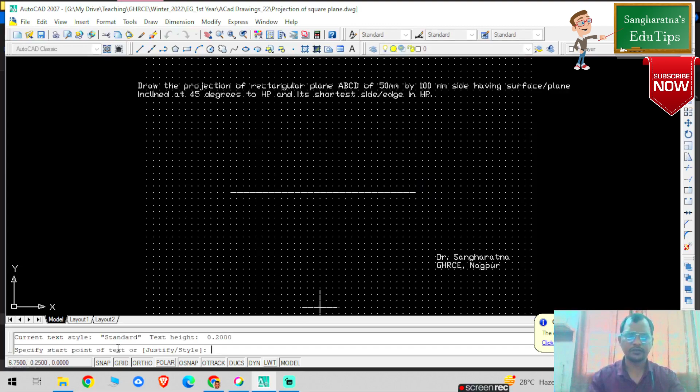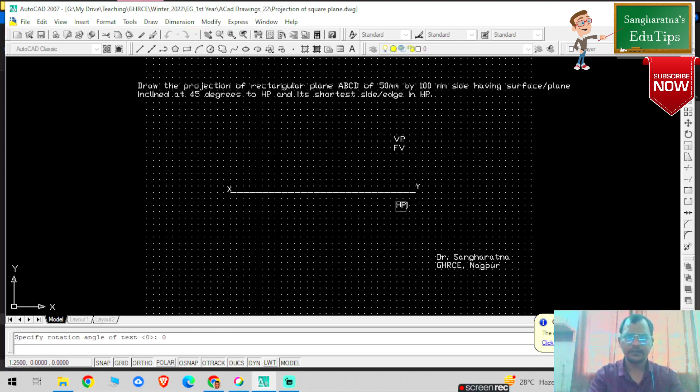Its shortest side edge is in HP, meaning the true length will be on the XY reference line. So let's draw it. Draw one reference line XY, click snap, and give it a naming label. Select any point, height, rotation angle 0. This is my X and Y reference line. Above the X line is VP, where we always draw the front view. This is HP, where we draw the top view.

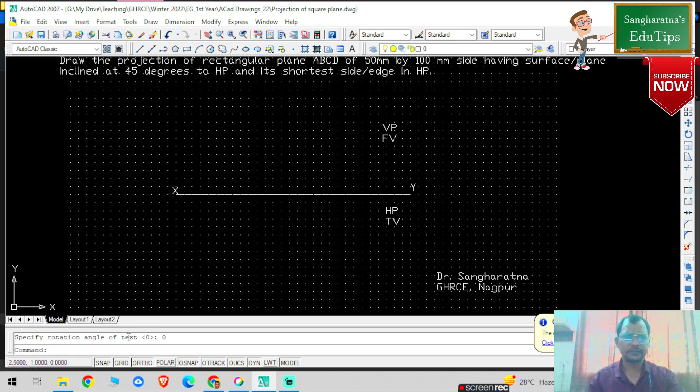Now press escape. First draw a rectangle of 50 mm by 100 mm. Select any point, because the side or edge in HP means the left hand side will be perpendicular to XY. So here I have selected, and this is my 50 by 100 mm rectangle.

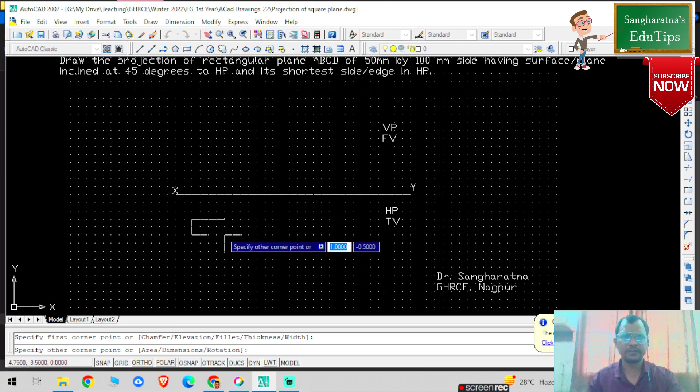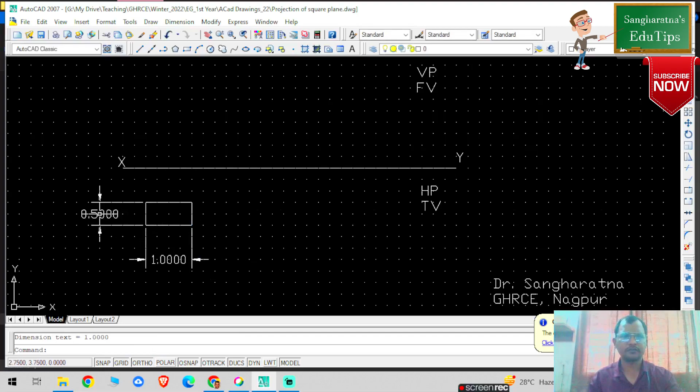You can check the dimensions. Go to dimension, select line, and this point is 50 mm. Go to dimensions again, select this point, this is 100 mm. Convert these dimensions into cyan color. Whenever you can't see anything on the screen, just zoom it. To return to the original screen, press Z, enter, A, enter.

Now I am going to add the text labels. Click on the screen, specify height 0.1, or I can select 0.2, rotation angle 0. So this is my A, B, this point is C, this point is D, and this is my true shape. Once you draw the true shape, your true length will be perpendicular, and it will be a straight line drawn either on the XY reference line or above it.

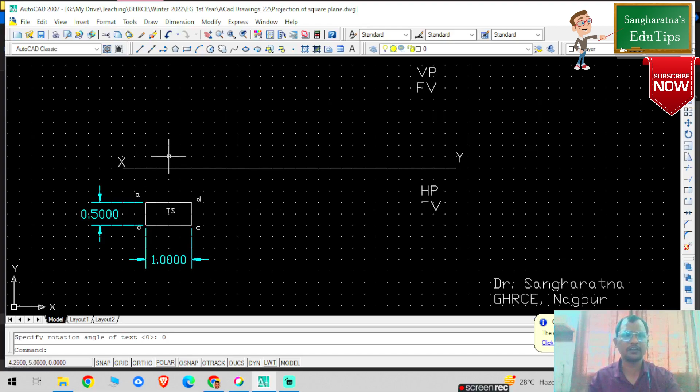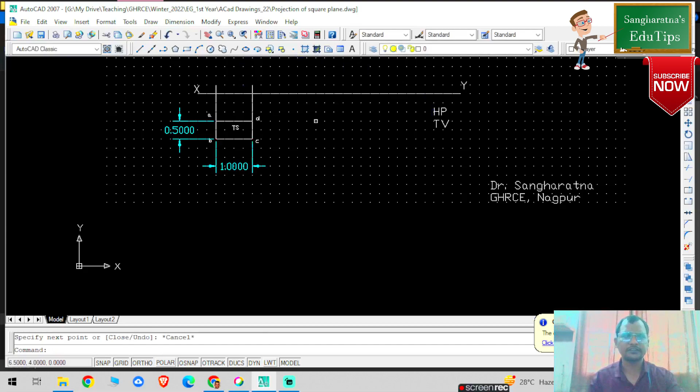But in the problem statement it says side or edge in HP, meaning my true length will be on the XY line. To draw the true length, I will draw vertical projectors. This is one projector, and from this point I draw another. Press escape, zoom it. Now I have two points here, press escape, and this is my true length.

Immediately I give the name. Selecting the text, point 1, rotation angle 0. So this will be A dash, B dash, and this will be C dash, D dash, and this is basically my true length.

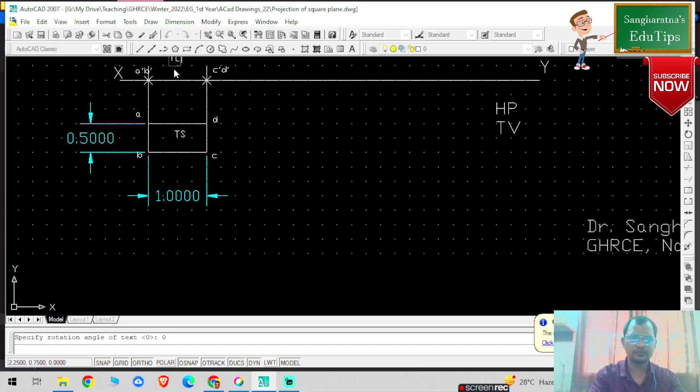Now I'll give the dimensions. Press escape, go to dimensions, select align, select this point, and this is marked in red. Convert these dimensions into cyan color.

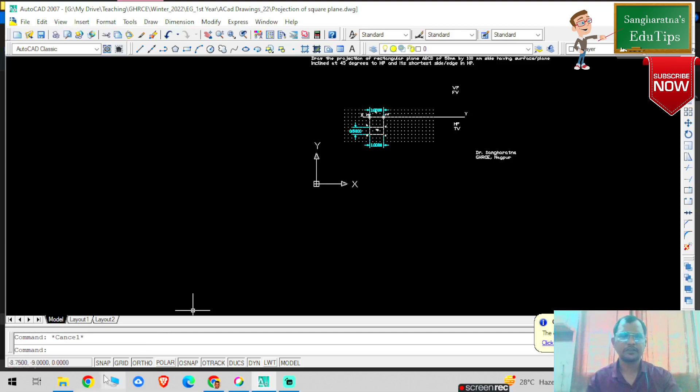Now, what is the true length inclination given in the problem statement? Press Z, enter. The true length inclination is 45 degrees. Whenever the problem states the surface or plane is inclined at 45 degrees to HP, that means the true length inclination is given. So I am selecting a point on this reference plane, let's say here. This is my A dash, B dash.

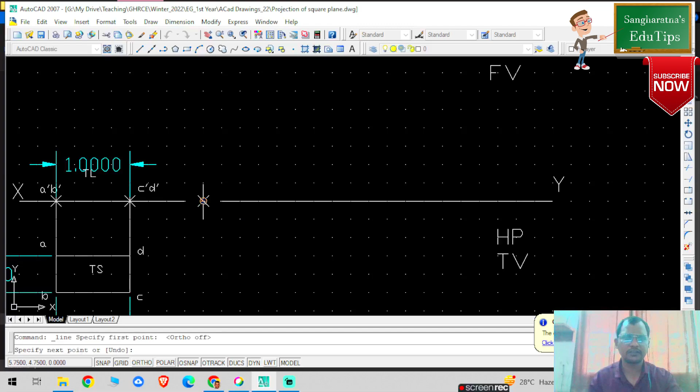From this point I select a line. Before that, select ortho, click ortho, enter one AutoCAD unit, press tab, and the rotation angle is 45 degrees. So this is basically my one AutoCAD unit line.

I select the point here. Let's check the dimensions - this should be the same. Yes, this is 100 mm, convert into cyan color. Do the dimensions again, select angular, and this angle is 45 degrees. Get it converted into cyan color.

Now give the naming text. Select any point on the screen, specify height 0.1, rotation angle 0. I was usually selecting 0.2, but the name was a bit big, so now I'm selecting 0.1. So this is my A dash, B dash, this point is C dash, D dash, and this is my true length inclination.

Now I'm going to draw perpendicular projectors from these two points. From this point, vertical projectors, and from this other point again. If it's not snapping properly, select and click on snap. Now you can see this is selected, and if it's not coming perpendicular, select ortho. So this is now my two vertical projector lines.

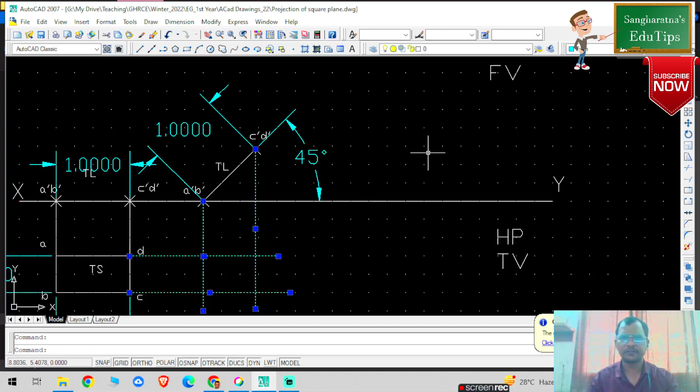So I got 4 points here at the intersection. Mark these 4 points - this is my first point, second point, third point, fourth point. Now draw a straight line joining these 4 points.

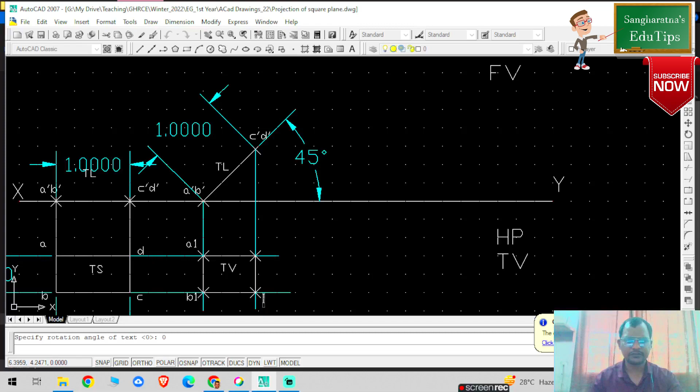Snap commands you have to regularly check. So this is basically my top view. I'm going to give the naming details - selecting here, point 1, rotation angle 0. So this is my top view, and this point is A1, this point is B1, this is C1, and this point is D1.

I hope I have given all the dimensions and marked them into cyan color. So this is the solution for the projection of a rectangular plane of 50 mm by 100 mm side, inclined 45 degrees to HP, with shortest side AB in HP.